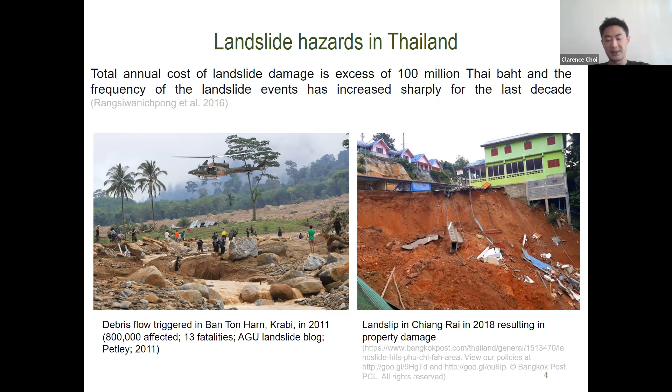And it's important to stress the potential impact and implications of our work as geotechnical engineers. Why should we spend more efforts on landslides? It seems like a topic very reminiscent of earthquakes. These are natural hazards that are ongoing, but why should we pay attention to them?

We should expect wetter climates, and we understand as geotechnical engineers that a wetter climate will cause increase in pore pressures in slopes and potentially decrease effective stress, leading to resistance, particularly shear resistance decrease, and potential increase in slope instability. So it's a chain of events happening, and that's how we justify our ongoing research efforts.

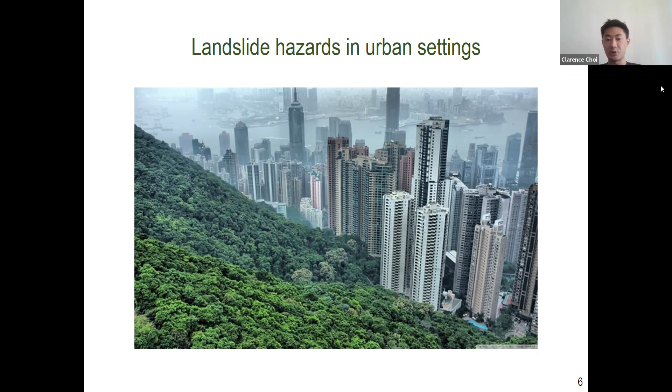So although Hong Kong seems like a very prosperous, safe, geotechnical marvel against landslides, this has not always been the case. We've had to learn from bad experiences, improve with geotechnology, and that's what has enabled us to become such a leader in the landslide discipline globally today. So I hope this helps to show that we've faced a lot of challenges in the past.

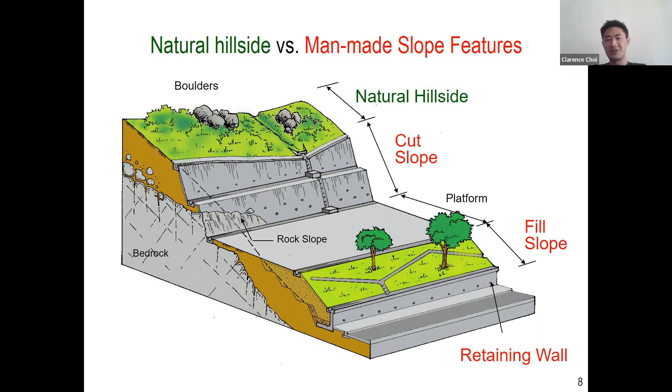Likewise, we also refer to retaining walls and retaining slopes as man-made features, and anything else above we call natural hillsides. The focus of this talk today is mainly on landslides associated with natural hillsides. We can have boulders and rocks falling down slope. We can have debris flows, which are mixtures of water and soil surging downslope, picking up these boulders, and impacting various infrastructure. So I want to stress and frame the talk today to mainly natural hillsides, and I'll place less emphasis on man-made slope features. I hope that helps you frame the presentation.

To further elaborate on the instructional components of my talk, quite commonly we get confused with landslides. What is a landslide? Is a debris flow a landslide? Is a rock fall a landslide? Is a slip of a slope a landslide? Well, you're right, these are all landslides. Even avalanches comprising snow can be a landslide. Any mass movement of earth material we refer to as a landslide. And debris flow is just one type of landslide.

So it's important to have internationally recognized classification systems for us to talk to each other as engineers. It would be quite difficult to explain, for example, if I want to say this landslide looks like this, but it may not be very clear what I'm talking about. So fortunately for us, Varnes, Cruden and Varnes in 1978 and 1996 published a systematic landslide classification system. My focus today will be on two types of landslides, debris flows and rockfall.

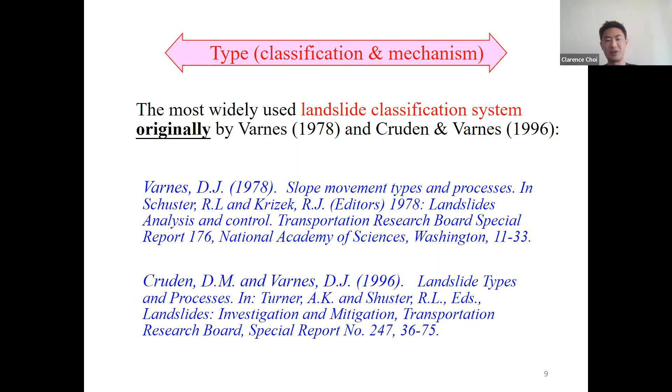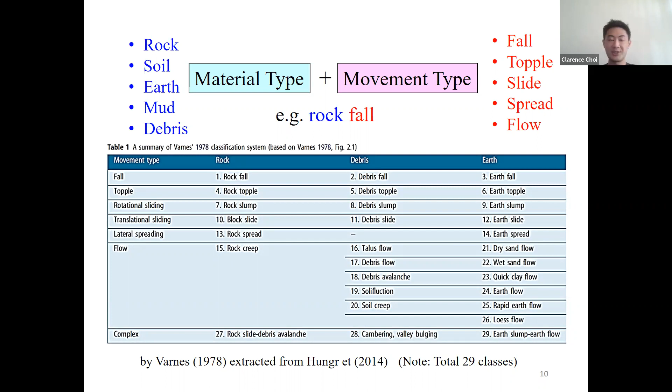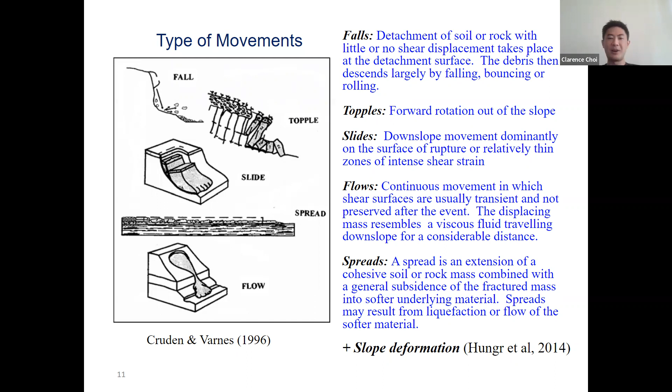To further break down the types of movements, the main focus we'll be looking at today is at the bottom of the slide here, pertaining to flows. If you're curious as to what fall, topple, slide, and spreading look like, they're shown at the top of the slide with some definitions, but that's strictly unnecessary for today's talk. Of course, you can find Professor Oldrich Hungr's 2014 manuscript in Landslides to understand the types of movements more. So I'll leave that as it is.

Why do we want to talk about debris flows and rockfalls today? Well, I feel like these are perhaps the most destructive. How do we characterize the destructive significance of a landslide? Thankfully, Cruden and Varnes in 1996 further extended the landslide classification system to include a velocity class, essentially from 1 to 7. The faster the landslide, the higher the velocity class. We can expect that the faster a landslide is, whether rock or debris, the less time you have to evacuate. There are, of course, slow-moving landslides as well.

If you're focusing on the hot topics around the world, we're interested in how climate change and changing climate variables, cyclic climate loading, are affecting the movement of these very slow-moving landslides. These slow-moving landslides have already failed, and they're perhaps creeping just millimeters per year. But the scary thing is, we don't really know when these landslides will suddenly accelerate and cause catastrophic failure.

So just to give you a bit more background, today we'll focus on only the extremely rapid landslide classes near the top. We're talking about movements in excess of meters per second. Debris flow and rockfall can travel in excess of 10 meters per second, just for your reference.

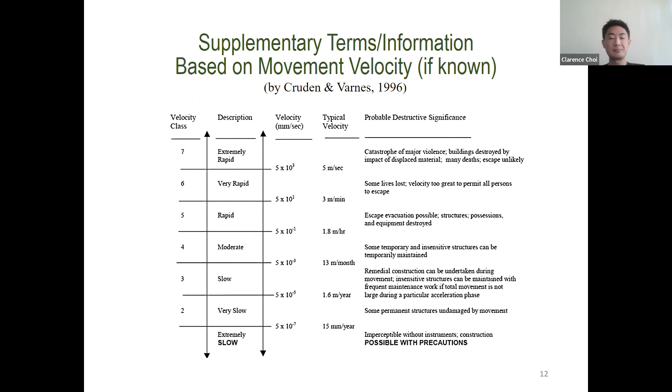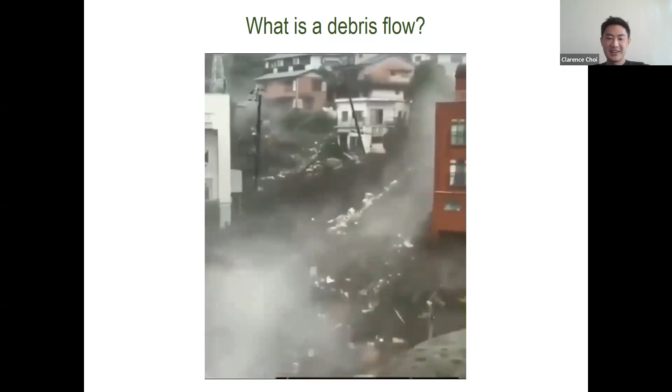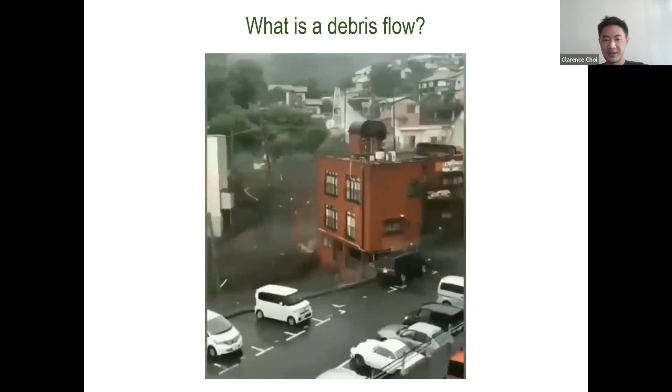So we can see that a debris flow is very mobile. It's almost fluid-like. It can carry all sorts of debris along the path, including buildings and vegetation, and there's really not much time to escape and evacuate because of the speed. Also look at the impact force resulting from the debris flow. It entirely destroyed the house along its flow path, took out the power lines, and it can even carry cars. So this is what a debris flow is like.

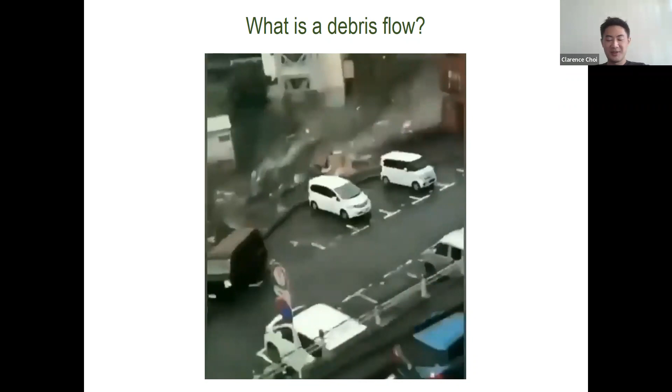So that's as much background as I want to give pertaining to characterizing the type of landslide for today's lecture. The next part of my talk will basically focus on the types of mitigation measures, hard measures, to protect the general public and infrastructure against these debris flows. These solutions will be broken down into 3 sections.

The first section, I'll talk about engineering solutions. This is practical. There's not going to be a lot of fancy research tools being used. We tend to go for large scale or field scale solutions, and we try to propose solutions that can be used by engineers. We're not going to propose constitutive models that require 14 input parameters or that only 3 PhD researchers know how to run, right? We're talking about very simple to use engineering equations and solutions that are always on the conservative side. So that's the first part.

The second part, I would still call this ivory tower research: nature-based solutions. It sounds very attractive, doesn't it? We can use nature to help us protect the general public from landslides. But this is just the beginning of this research. To actually implement nature-based solutions will require some time, and it'll require experienced engineers to be able to...

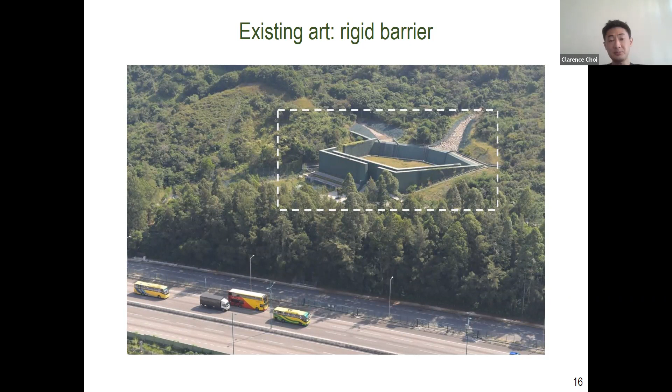So what are the advantages of flexible barriers? They blend in well with the natural terrain and environment, they're much smaller in scale, and not visually intrusive. You can install them further upslope so the debris or rock doesn't pick up velocity and momentum, meaning we don't need such massive structures. They're also cheaper to construct, but everything has limitations—you can't handle such large volumes because these nets are limited in size. There are weak points: the posts, if hit by a boulder, might be incapacitated. Also, they're made of steel, and in Hong Kong's extremely corrosive environment we're starting to see long-term serviceability problems. Notwithstanding, the concept of a flexible barrier is like a net that enables deformation, and we know anything that enables deformation can help absorb impact energy.

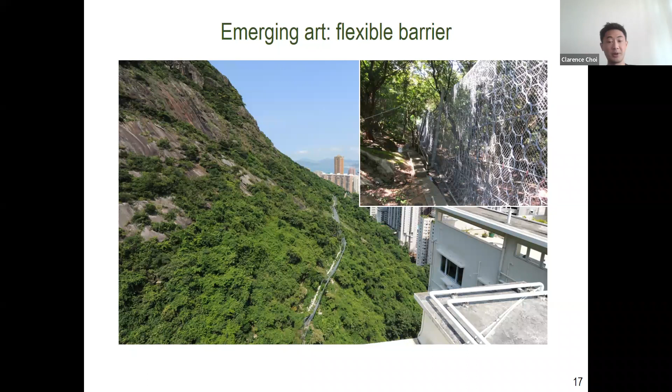How do we predict the load on these structures? Well, let's use engineering approaches, not academic approaches with fancy equations with 32 input parameters to match the impact load. This is what we use in design guidelines globally.

It's quite simple, based on the conservation of momentum. If we take the equation at the top of the slide and dissect it down based on conservation of momentum, we can break it down into the second equation in the middle of the slide.

And we can very quickly understand why we benefit from a flexible barrier. It's because of the relative movement between the flow and the barrier. This is very much reminiscent of a boxer, right?

You see the boxer on the left there. If he moves towards the punch, it's going to hurt him more than if he can move backwards while being punched. It's more or less the same concept — we want relative movement between the flow impacting the barrier, and deformation with the barrier.

So this is one mechanism. Of course, a debris flow flexible barrier has other mechanisms, such as being a little pervious, so we can let a bit of momentum on the discharge pass through the net, meaning the net doesn't have to absorb as much impact energy.

Also, when we arrest the flow, we've learned through research that granular debris flow is very frictional. The moment you shear the flow, you can mobilize a lot of the frictional resistance, and the flow will rapidly attenuate. So there are lots of mechanisms we can learn just by looking at a simple conservation of momentum.

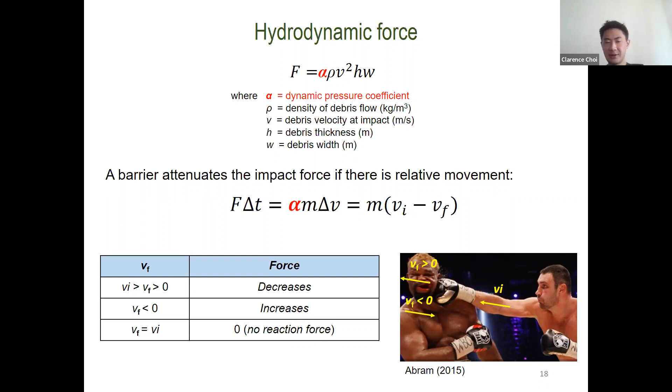V final is 0. Now, if you pick an alpha of 2, this is perhaps the extreme case where something hits the barrier and then reflects in the opposite direction at the same velocity. That would augment the impact force by 2 times. So there is some theoretical relevance in the hydrodynamic force.

The second type of force we consider is the retained static load. Let me showcase this static force with an experimental video. In this video, a debris mixture comes from the bottom to the top of the slide, and some of it hits this plate here, while some passes through downstream.

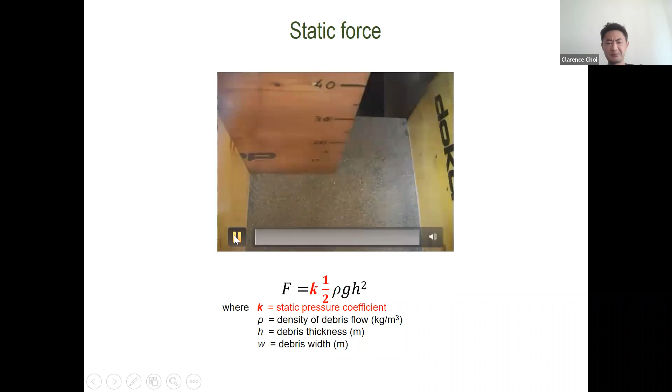So why do I want to show this video? Well, I want to show that even for a dynamic scenario, you can see on the left side there's retained static loading, and there must be some static contribution even during a debris flow impact event.

So there are design guidelines that cater for static loading. We can use earth pressure coefficients: 1/2 rho g H squared will give us a nice static load. I think that's easy enough for us to understand as geotechnical engineers.

So based on these simple concepts, we want to use something that engineers can relate to, so we can just combine the dynamic and static components to get the total impact force. Sounds easy, right? Well, yes and no.

The static load can be made conservative if we assume the earth pressure coefficient is 1. We know from geotechnical engineering that a pressure coefficient of 1 is basically treating this debris like water, with no internal strength.

That's easy to make conservative, but the dynamic load on the left is not so easy to predict. The theoretical values I mentioned earlier, 1 and 2 for alpha, are perhaps for an idealized incompressible fluid like water, but we can probably surmise that a complex mixture of soil and water is not like water at all mechanically. In fact, debris flows even have boulders. So what do we do?

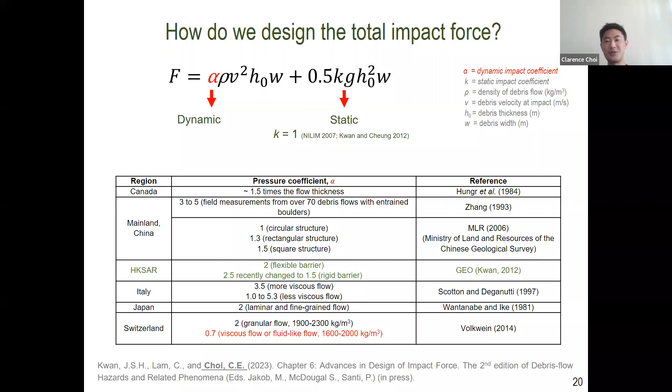And I can't share all the research findings in the talk today, but I can fast forward and show you the ultimate outcomes. So how do we study this problem?

Well, I'm a physical modeler. Varun's also a physical modeler. We understand that physical modeling requires scaling considerations. If we don't have scaling, it really doesn't make us unique as physical modelers. Anyone can do our job and make a model. The key task with physical modeling is how do we link reduced scale model phenomenon and expand it back to full scale. That's how we draw implications in research.

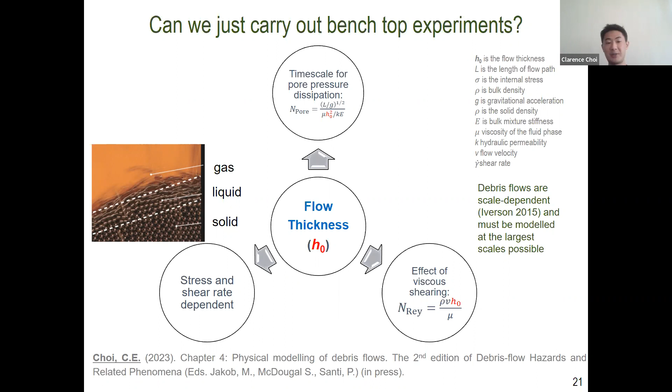So where am I going with this? Well, I want to show that because we cannot carry out small scale experiments for debris flow, it simply will not work. We have to carry out field scale flows. And this is in collaboration with Professor Charles of HKUST, and we've developed a facility at the HKU Kadoorie Centre. So let me just show a video of this.

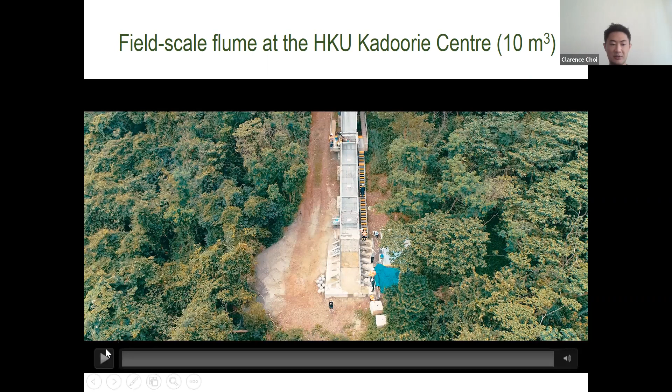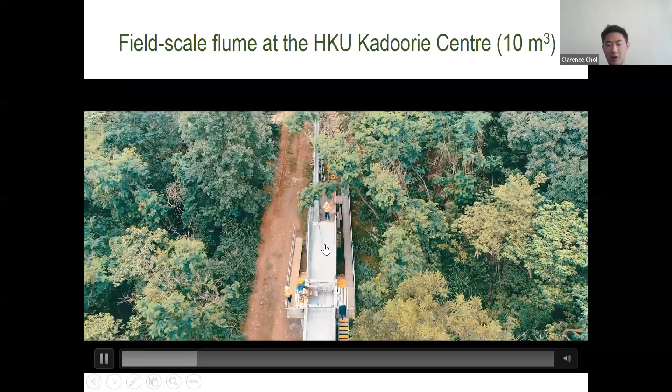This is a facility that's about 28 meters in length and can model 10 cubic meters of debris flow. There's a gate at the upstream end controlled with a mechanical arm, and we store 10 cubic meters of debris behind it. When the gates open, the debris surges down the channel.

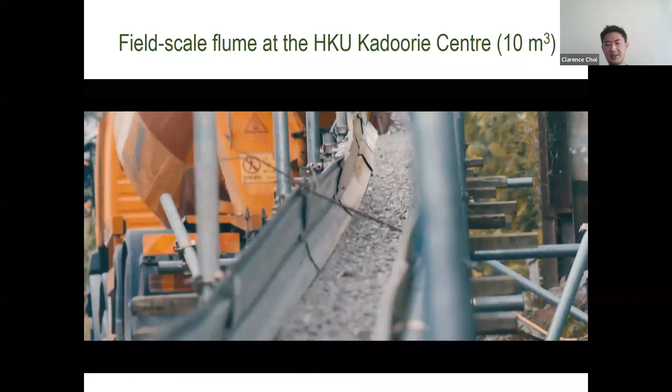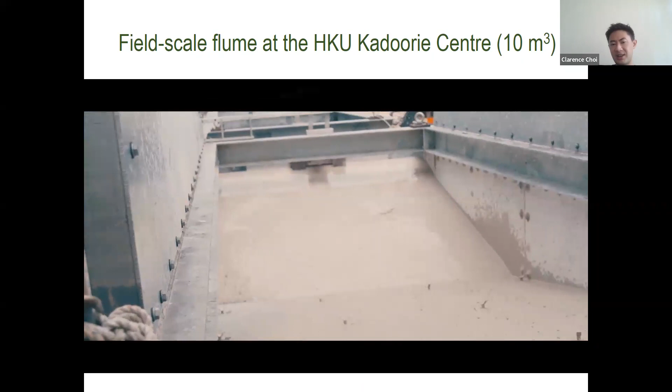Inside, the channel is instrumented. Here we use a concrete truck to funnel pre-made debris mixtures in. We can have UAVs capture displacement and velocity fields. This is the mechanical arm of the door opening, and that's the debris moving downslope on top of the instrumentation.

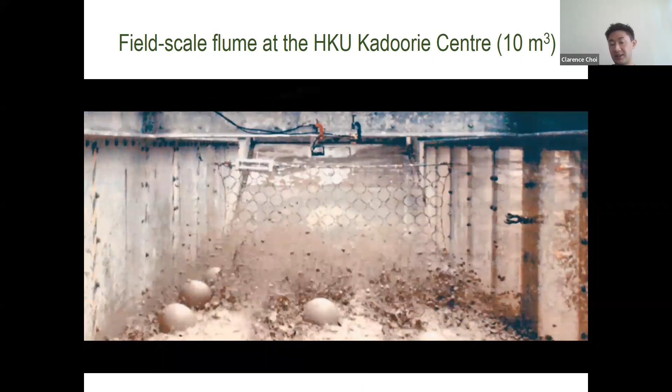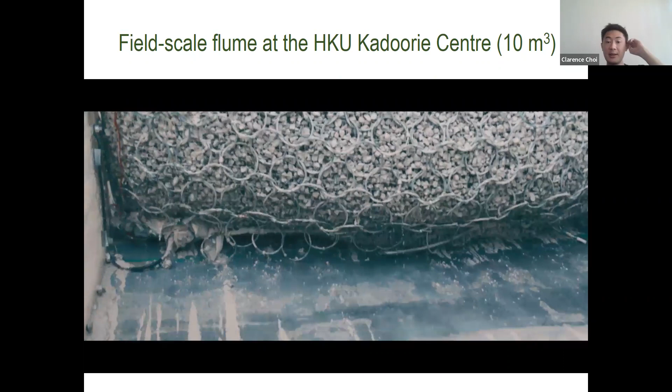This is the flexible barrier model with scaled deformation, shown from another view, and a side view looking at the deformation of the flexible barrier. Here's a plan view, along with some more fancy views from the UAV.

Afterwards, we can study the retained profiles of these barriers. This is, in essence, a large-scale facility that enables debris flow research.

Along the channel bed of this facility, we've installed a lot of instrumentation, because physical modeling is only as good as what you can measure. We developed in-house debris flow cells to measure the pore pressures generated at the base, normal stress, and shear stress. By knowing the normal stress, we can deduce the bulk density of the flow, and if we place a laser sensor directly above it, we get the flow depth.

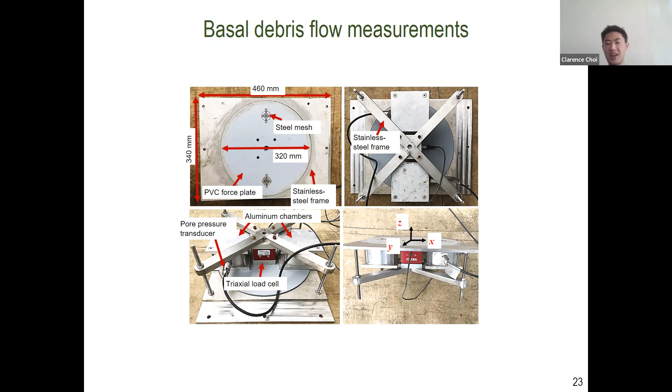Here are different views of the special instrumentation we developed in-house. We use triaxial load cells to minimize the number of cables that we need, and that's what we use.

The volumetric solid content we use is 60%, which is in line with most debris flow mixtures globally.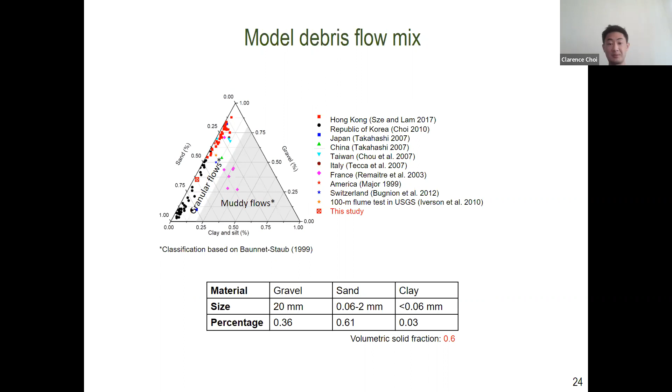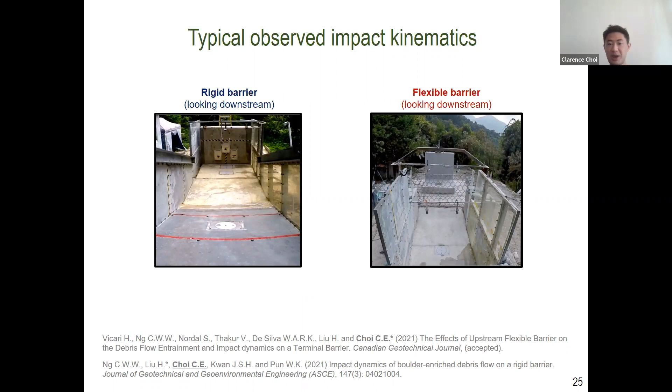Now let me show you some typical test kinematics. As mentioned, we carry out a decade of research on debris flow impact to look at how different types of structures, such as rigid barriers and flexible barriers, behave. Let's take a look at the rigid barrier on the left side.

Nothing fancy here. We have about 2.5 cubic meters of debris flow impacting a rigid barrier that's heavily instrumented. We have load cells behind the rigid barrier, so we can measure the bulk density of the flow and the load, and back-calculate some of the pressure coefficients.

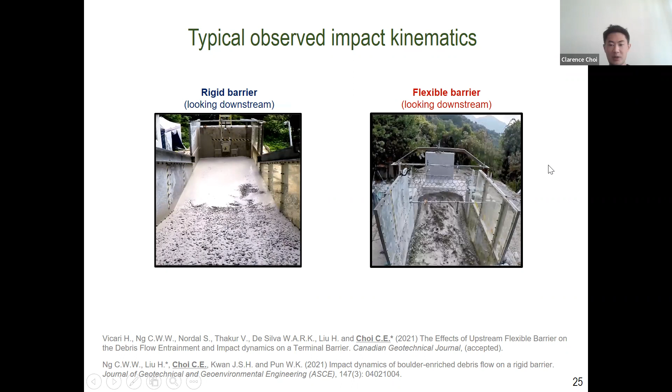Likewise, on the right side, we have a 10 cubic meter debris flow impacting a flexible barrier, and it smothers the GoPro camera, so you can't see much after that. These are just typical observed impact kinematics for different types of barriers using the large-scale facility.

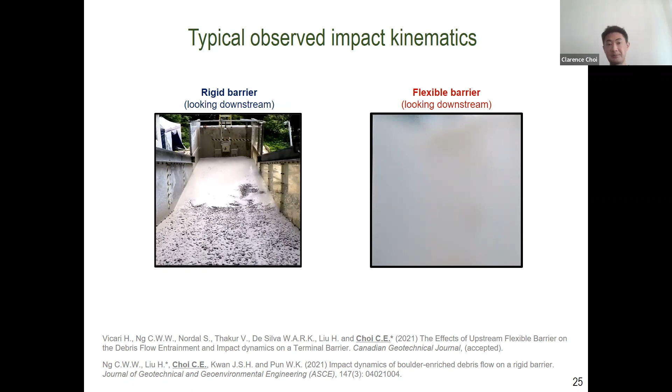Let's fast forward from when we started this research to about 10 years down the road. Eventually, working with Professor Charles Ng and his team, we developed a rationalized combination of static load, dynamic load, and proposed impact coefficients relative to existing design guidelines.

So what were we able to achieve? Research isn't very useful if you can't make an impact in practice. We were able to work with industry to change recommended values in design practice. This is the most important impact of any research: can you change design practice, can you get your research to be relevant in design guidelines?

We were able to contribute to rationalizing the reduction of the design capacities of rigid barriers by 40%. The alpha values for rigid barriers used to be 2.5; after our research, we were able to tone this down to about 1.5. Hopefully we can also see the rationalization of flexible barrier alpha coefficients from a value of 2 to 1, representing a 50% reduction in design capacity.

Any reduction in design capacity is pretty much saying that we're reducing cost. So we hope we're no longer over-designing barriers because we don't understand the impact mechanisms. But now, with the rationalized experimental evidence we have using large-scale facilities, we can bound the impact pressures and propose optimized values, not just locally, but hopefully globally as well.

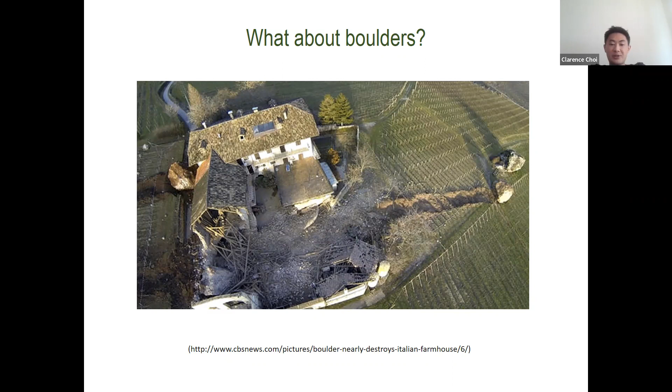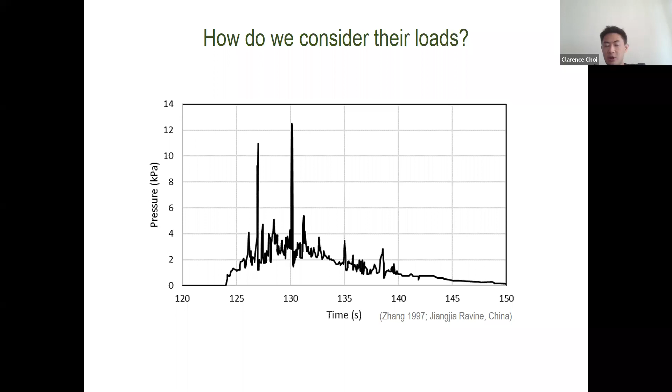Well, we can see that there's two types of loads. There's the distributed loading from the soil water mixture. By soil, I'm not referring to anything boulder-esh, such as anything larger than 200 millimeters perhaps. And we also see concentrated loading from boulders. These are very short impulse loads that generate very high pressures on the load measuring device.

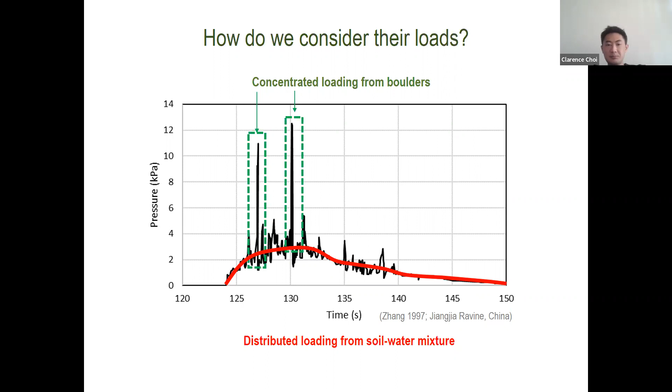So how do we design for the boulder impact force? Well, to be very frank, it's very difficult to estimate boulder impact force. I'll explain why. A boulder, when it touches the surface, let's say the surface doesn't deform much, is in essence a single point contact. Now, a point contact with an impact force applied to it can result in an infinitely high stress, if you think about it, in terms of force over area.

So how do we propose any approach to rationalize the computation of the impact force? We would have to also consider maybe there's potential deformation at the surface of a hard inclusion impacting a deformable surface. So most design guidelines around the world adopt Hertzian contact mechanics.

And the problem with Hertzian contact mechanics is we assume linear elastic behavior that's isotropic. We don't consider any frictional components. We assume that the contact radius is much smaller than the dimensions of the bodies involved. And that's how we can get some equation to predict the impact force.

Now, based on the body of research we've done, we know that Hertzian contact mechanics, which is purely elastic in nature, substantially over-predicts the impact force by the boulders. You could say we are safe, but on the other hand, we might also have a lot of design problems because the impact forces we predict are not practical to mitigate against because they're too large.

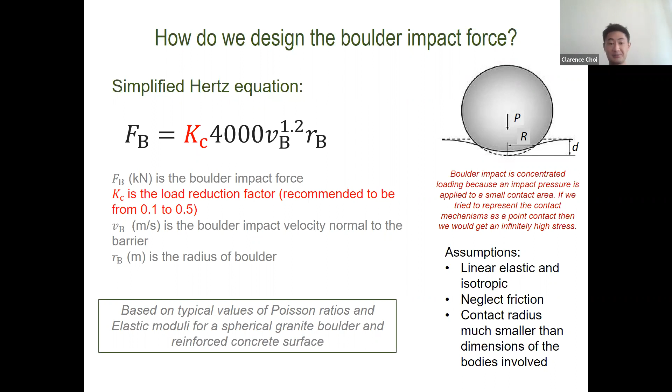Bear in mind that this design has not been evaluated or validated, right? We just place these prescriptively in front of a barrier. Conceptually, we understand if a boulder hits this baffle, it should survive, the I-beam should deform, it should take some energy out, and hopefully it doesn't impact the post of a flexible barrier or damage the concrete face of a reinforced concrete barrier. So conceptually, it's easy to understand why we place these steel baffles upslope.

Now, I would consider boulder impact on a shallow footing with the I-beam an extreme soil structure interaction problem. Why is it extreme? Well, I talked about it already. We have a boulder with a point contact on a structure, which means that the stresses will be infinitely high.

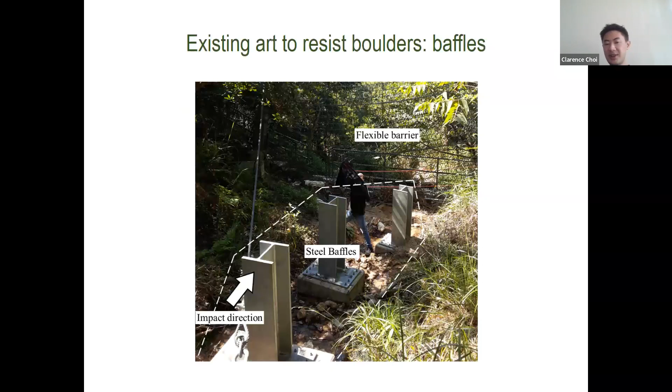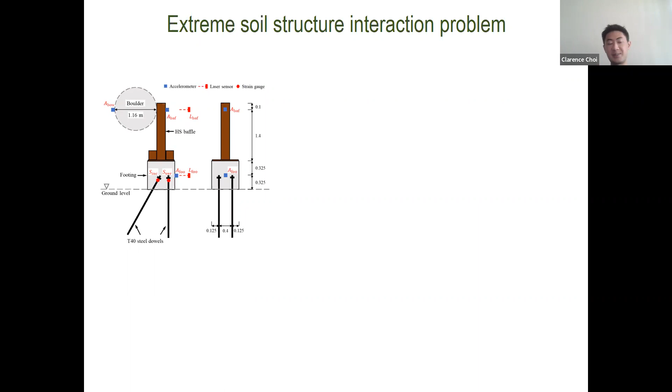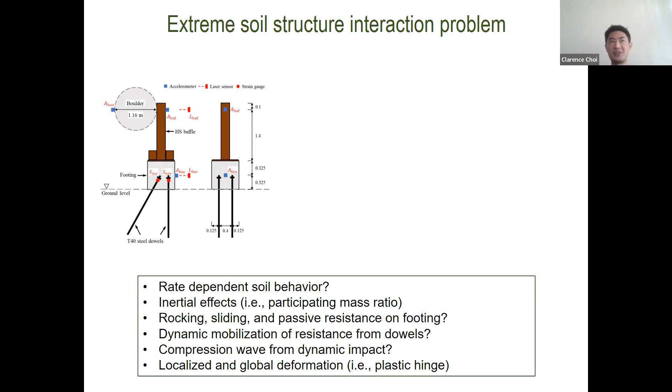This is a very interesting problem as a geotechnical engineer, and for me it's interesting as a researcher because I have lots of questions. What's the rate-dependent soil behavior we should expect? Is it different than quasi-static loading in the soil for the steel dowels? Is there an inertial effect? Does it matter how heavy the baffle is relative to the boulder? How will this shallow footing behave? Is there going to be rocking behavior as in earthquake problems? Do we care about sliding? Can we mobilize passive resistance? Is there going to be compression waves from dynamic impact? How do we cater for this inside the constitutive models of the soil? Last but not least, we have localized and global deformation, potentially leading to plastic hinge formation from a structural point of view. If you think about all these questions, it becomes a very complex problem.

However, we decided to impact one of these structures in the field first, and let's see what happens.

Well, if you're not sure what happened, let's take a look at the PhD student here. He's not very happy because we did not expect this to happen. We didn't expect there to be structural failure. This baffle configuration doesn't work at all. It's because the boulder is much heavier than the baffle and the footing. It doesn't even mobilize any resistance from the foundation.

So we had to stop this research project in collaboration with industry, and we had to go back to the drawing board. When we did, we realized there's no need for such a complex design. Why don't we revise our design to just a pit in the ground, one monolithic hollow section, and then fill the hole with concrete. There's nothing fancy here - it's a very simple engineering solution back to basic principles of participating mass ratio. We just make this thing as heavy as possible so we can mobilize resistance from the soil. Let's see how it works.

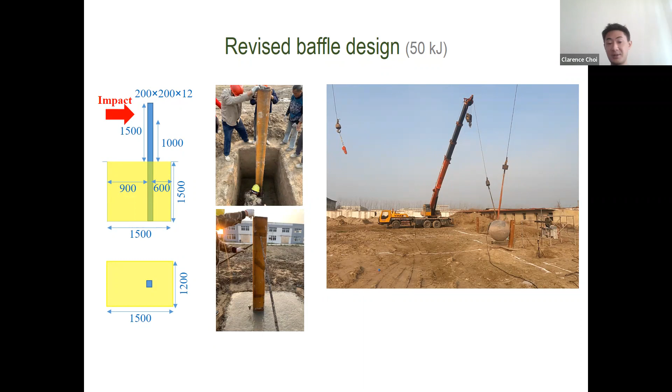Well, it works fine, works like a truck. No need for such complex structural connections, no need for fancy ground anchors and tiebacks. This works quite well for up to very high energy levels. What you see here is 50 kilojoules, and this was a joint project with Dr. Andy Suyuchun in Nanjing University, at one of his sites. He was able to help us carry out the experiments here.

So this project just started and we just finished the test. We haven't had time to interpret the results. As I mentioned, this can be a very complex soil structure interaction problem.

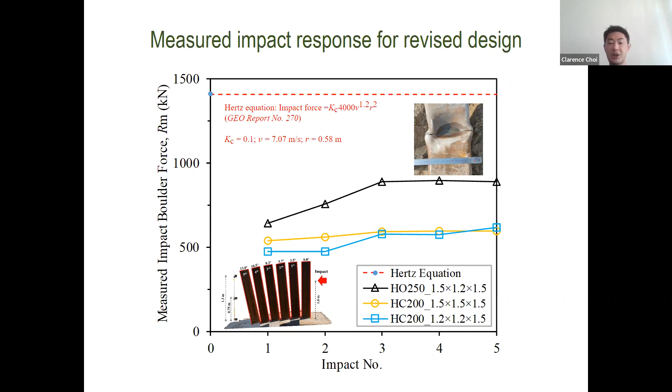Essentially, the y-axis is the impact force, I apologize for not mentioning that earlier, and the x-axis is the number of repeated impacts on a particular structure. Hopefully in a couple of months, when we improve our interpretation, we can share more unique findings with you.

So the next question is, what's happening with this problem? Well, we haven't had time to think about it because we've had to initiate the next project. We want to combine several baffles with industry to create straining structures to catch these boulders using several steel members placed inside concrete footings. So we're now revisiting our data and looking at using large deformation, nonlinear finite element models to capture the response of these straining structures, so we can place these types of structures on hillsides to arrest boulders before they impact the flexible or rigid barriers - this will save impact capacity and cost.

So I want to just showcase this slide to show you that we're working on straining structures, but we've barely scratched the surface. We really believe that force-based approaches are not so reasonable. We should be looking at everything from energy-based approaches first. The reason force-based approaches are not reasonable is we've learned that it's very difficult to evaluate how reliable your forces are if you measure it using an accelerometer and just the mass of the boulder. We're also not sure how sensitive the constitutive behavior of the soil is. So is there any value in carrying out complex numerical modeling? I've just thrown a bunch of questions out here, not to confuse you, but to show you that there's a lot of work to do in this dynamic soil structure interaction realm of research.

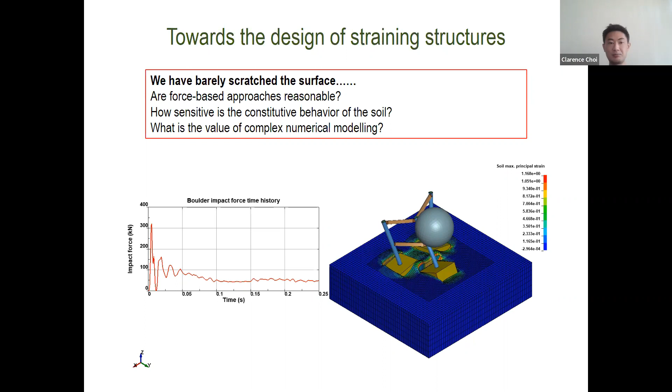So that's all I want to talk about for engineering solutions. That's the practical part of the problem. Now let's look at the more research-oriented part. I call this the ivory tower research, which is a joke, but hopefully one day we can rationalize nature-based solutions to use for landslide hazard mitigation.

Notwithstanding, there are other complexities with using forests as a natural barrier. For example, trees can uproot. If they're impacted by a very heavy force, they can either rotate over, detach from the ground, become part of the debris, or if a tree is very strong, nothing will happen to it.

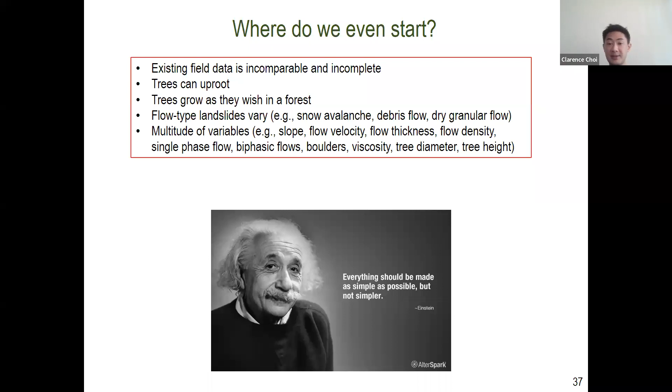Now, let's change the reference here. So we can imagine that the jet is the obstacle, the tree stem, and the air that the jet's moving in is the dry granular flow. Now, what happens if we do that? Well, if we do that, we see that dry granular flow hitting an obstacle will also form cones.

In fact, depending on whether the flow is steady state or transient state, the shape of the cone will differ. For steady state flow, we get quite a linear cone, as you can see in the middle. For transient state or unsteady flow, we see parabolic cones.

We can also use the concept of supersonic flows to describe this problem. Why can we do that? Well, supersonic only means if the flow velocity is greater than the sonic speed in the medium. And the sonic speed in air is 340 meters per second. In water, about 1480 meters per second. But interestingly, in dry granular flows, the sonic speed is only less than 1 meter per second. That's why we can generate these cones.

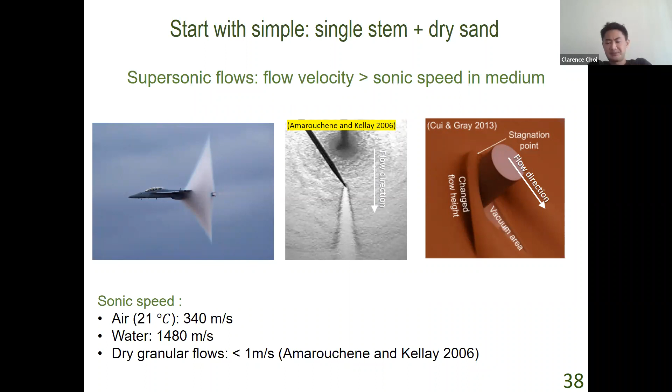Now, let's add the next level of complexity to this problem. What if we have stems adjacent to each other? Let's say we have dual stems, or two stems, in dry sand. Then what happens is we get these jets or cones essentially interacting with each other. In between two stems, we see that the flow will actually accelerate because the momentum is concentrated between stems.

And evidently, this is influenced by the spacing between the stems. If your stems are very wide apart, you're not going to have any near field effects. But if you place them very close together, you can see momentum concentration. And on the extreme end of the spectrum, if you have them touching each other, it's almost like a rigid barrier. So these are the effects we want to model.

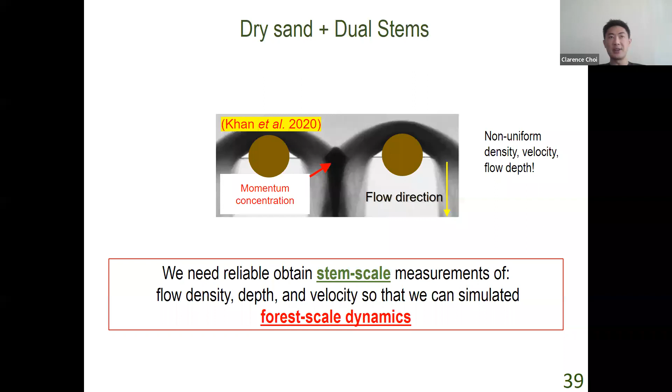Now, we need to think about this for a second. These cones are very specific in shape in terms of angle, length scales, stand-off distance upstream. So how do we obtain stem-scale measurements of flow density, depth, and velocity so that we have any chance of modeling forest-scale dynamics? Using conventional instrumentation and experimental means, there's no way for us to measure the shocks and interaction between shocks. So we need to use a new paradigm of methodology.

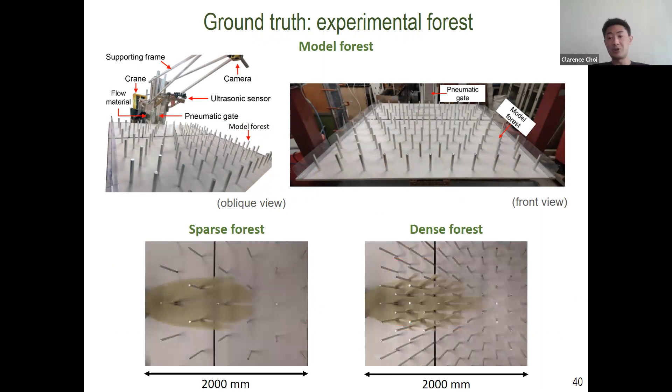Now, just like any other research, we often want to create a ground truth. So this is easy for us. We've created lots of physical models, and here we just create another one, a model forest with a regular pattern, a triangular array of aluminum cylinders that are more or less rigid. We can vary the spacing of the stems to model sparse forests and dense forests. And at the top of this model, we have a container to hold the dry granular material or debris flow that's wet and release it downslope.

Now, if you look at the two GIFs at the bottom, you can probably see how do we even use this data to calibrate a model? Because number one, it's dynamic. Number two, look at the number of shocks we have to capture. And these shocks are not the same. They diminish along the flow direction from left to right.

We have to be able to capture the local changes in velocity, the local changes in flow depth, and look at the complex pattern of the dense forests. If you notice carefully, the flow front in the dense forest case is much faster in the middle than it is spreading towards the side.

So how can we even track this dynamic process? If we use the camera mounted on top of this model shown here, we're capturing hundreds to thousands of frames per second.

Surely we cannot ask our PhD student to annotate 1,000 frames per second. I think they would quit, right?

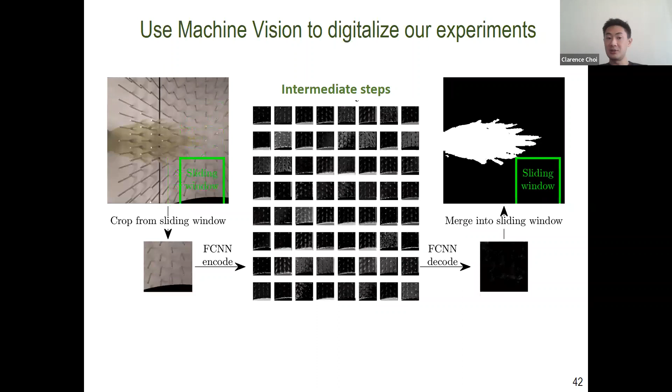PIV can only give you velocity fields if you have tracer particles or if you can detect the texture in the flow. And you'll get lots of PIV vectors that are not easy to use for calibrating because you have so many wild vectors. So this is the advantage of our FCNN segmentation technique for complex flow structure interaction problems.

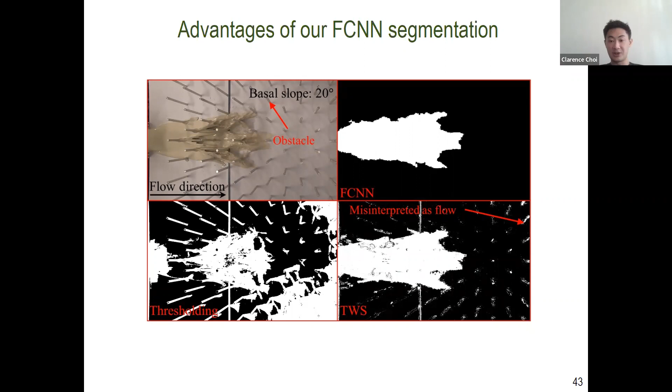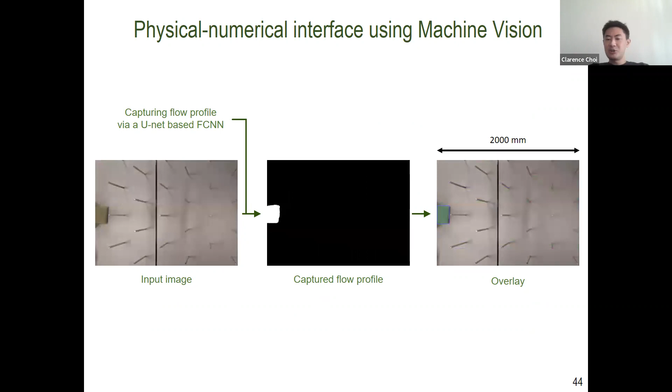The problem is the digital twin has no constitutive behavior. It has no physical behavior, no rheological constitutive behavior. It's just a digital overlay of the experiments. So what do we need to do?

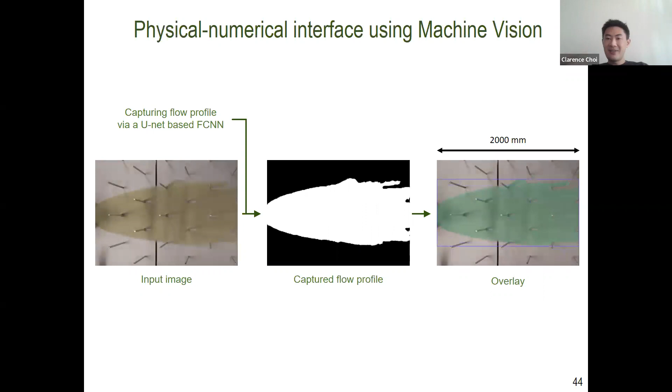Well, to use this so-called digital twin, we need to give it mechanical properties. How do we do that? Well, we can use constitutive models that are well established.

In this case, I work with my collaborator, Dr. Jinhyun Choo, who's at KAIST now, to use a material point method simulator to model the transition from elastic to plastic behavior. We use the Drucker-Prager criteria. We use a mu-I rheology for the granular flow.

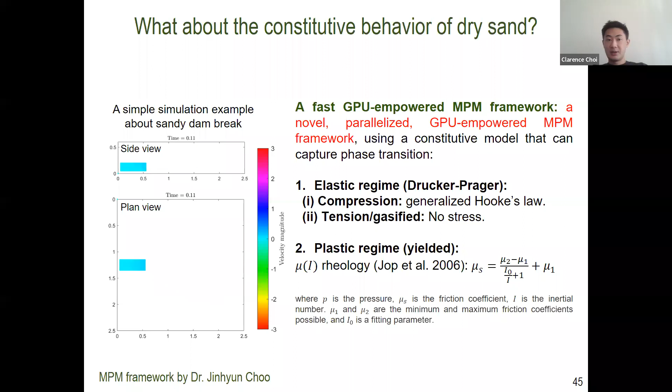Any MPM model, numerical model, is only as good as the input parameters that you give it. We always hear garbage in, garbage out. It's true, and it can be even more tricky when some people are trying to publish papers and they only show you one calibrated case. If they do 100 tests, they only show you the best match case for those tests. But how do you prove that your input parameters work for the 100 different cases?

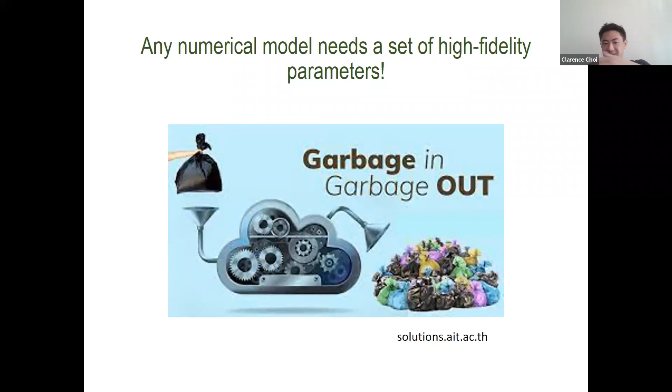So we carry out automated calibration of our MPM model just by using intersection over union, which I'll talk about in the next slide. So what are we doing? Well, we input an initial guess for the input parameters. This initial guess must be within the physical constraints of a parameter. We're not going to put a friction angle of 100 in. For dry sand, we're probably anywhere from 25 to maybe 40 as a maximum bound. So we input the physical extents and we let the genetic algorithm compare all 100 of our experimental cases and come up with the optimum set of input parameters to run.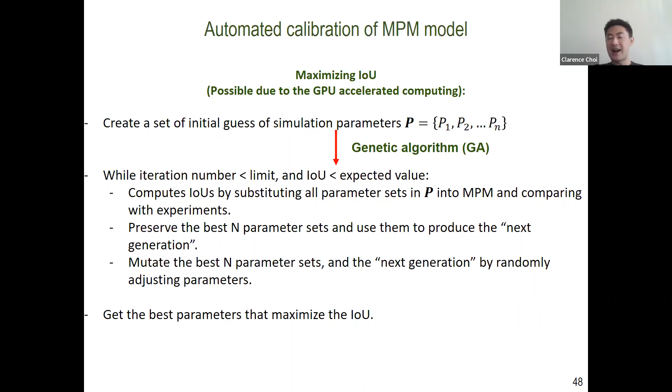So we carry out iterations, we find the best parameters, we mutate them and preserve them. How do we know whether a set of parameters is good or not, you might be asking. That's where IOU comes in, maximizing intersection over union.

What is the key performance index? Well, I just mentioned we use intersection over union. So we take our digital overlay, our digital twin, we compare it with the experimental results, we overlap it, and we see how different it is. If it matches perfectly, we have an intersection over union of unity. If it doesn't, it's zero. And we just try to maximize the intersection over union for a wide range of experiments. And then we get a high fidelity set of input parameters.

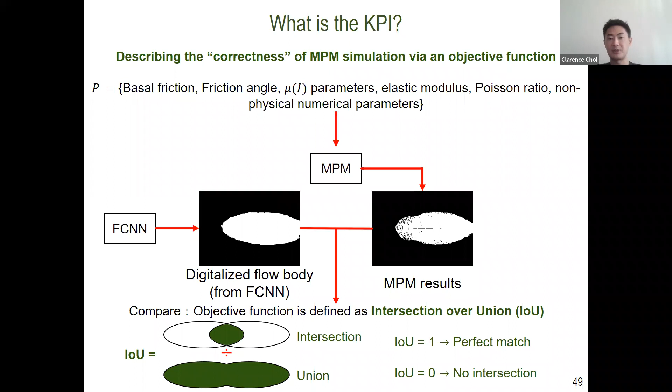So how did our genetic algorithm work? What you see here are two cases. On the left, we have 20 degrees. On the right, we have 24 degrees for the slope. The red line is the physical experiment, digital overlay from the FCNN. The blue blob is the MPM. So it works quite well for a different range of inclinations.

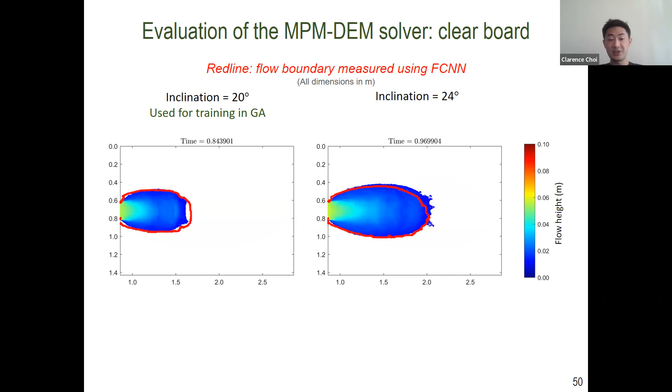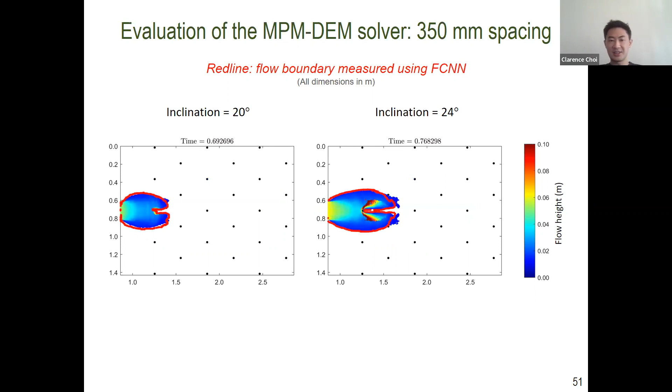So what happens if we put in the forest? This is the same input parameter. We haven't changed the input parameters for different simulations, it's the same set. Well, for trees, it gets a bit wacky at the front. I would still say it's acceptable. The red is the experimental digital overlay, the blue is the MPM. And then if you have a denser configuration, we're still doing well. We're not picking and choosing.

We're uploading these entire videos for the reviewer to look at during the review process. We're not just showing a few snapshots and saying, look, we have a great match. For any manuscript now, we can actually provide the entire video to show that we have a high fidelity set of input parameters for a wide range of simulations. And this in the past has been very time consuming to do for any researcher working on dynamic landslide problems.

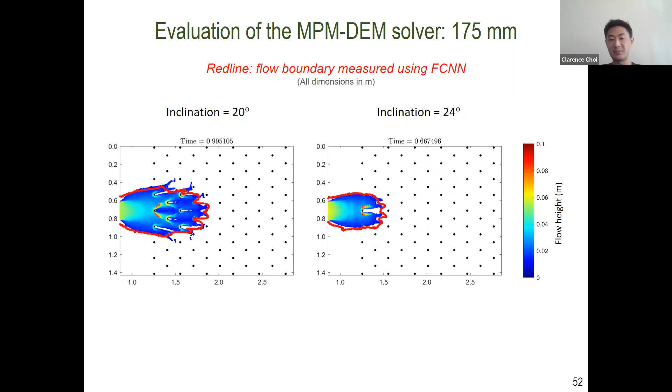So we can use our model now to carry out near real-time back analysis. We can look at different patterns. Here's a rectangular pattern or square pattern. An interesting phenomena, though we just started the research, is the trees, although they're not channels, they behave like channels. So if you have a rectangular or square pattern, you can accelerate the flow through momentum concentration in the middle and increase the travel distance or mobility of a flow.

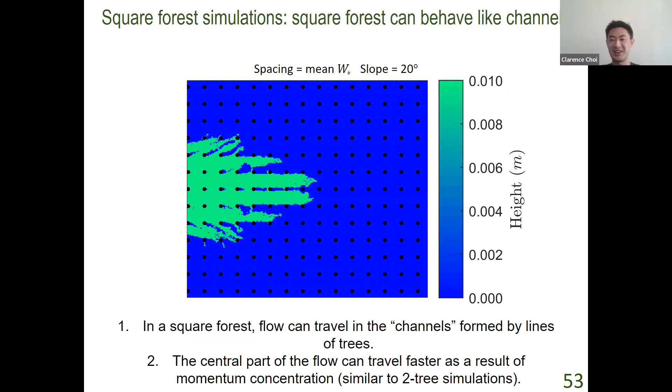If you densify the forest, you still get the same phenomena, but it becomes a lot more dissipative in nature. The flow front travels quite far, but the density of the flow front is not as significant. So this is what happens for a square regular pattern.

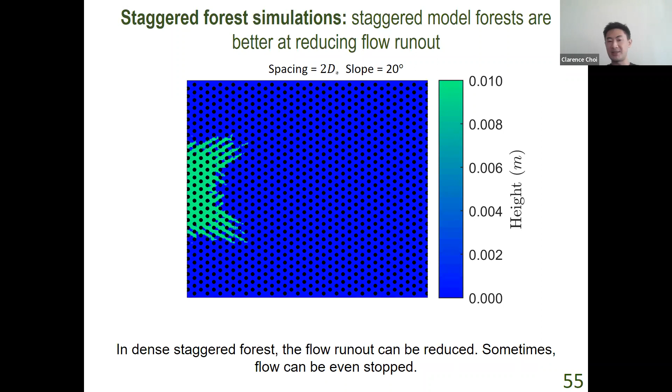What happens if we use a staggered formation? Well, it becomes very effective at acting as a natural barrier to kill all momentum. So what happens if we make it more sparse? Well, you still see the channelization effect if you zoom in. So it's a scaling issue. It depends on how you scale your forest relative to the flow parameters, is what we've noticed.

So in between tree stems, we see something we call momentum boost, which makes the flow move faster, travel further. And you can also have momentum dissipation when the flow hits an adjacent stem downstream. So there are competing effects between momentum boost and momentum dissipation. So if we have the concept that putting a forest along a slope must be better than not putting a forest, this may not always be the case because you can have momentum boosts depending on the configuration of your trees.

You might be thinking, who actually grows trees in a square pattern? Well, for cultivated forests, it's very normal. We use square patterns - evidently this is not for a debris flow, but there are square and rectangular patterns for cultivation because it's easier. If we want to use cultivated forests as a natural barrier against landslides, we need to revisit the spacing and pattern we adopt, which is a potential implication at the very early stage of our research.

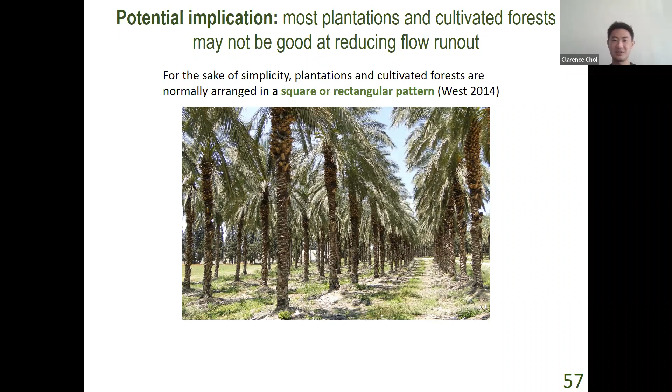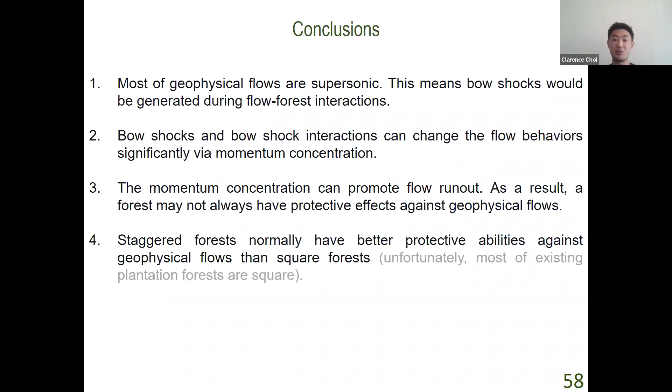So some key conclusions for the nature-based solution. Most of the geophysical flows that we deal with tend to be supersonic, so we have to be able to capture the bow shocks that form. Bow shock interaction can either boost momentum or dissipate it. The momentum boost can increase the travel distance and velocity of a flow locally. And we tend to want to use staggered formation for cultivated forests, which might be quite obvious, but it's not so obvious if you realize there's still momentum boosts going on locally.

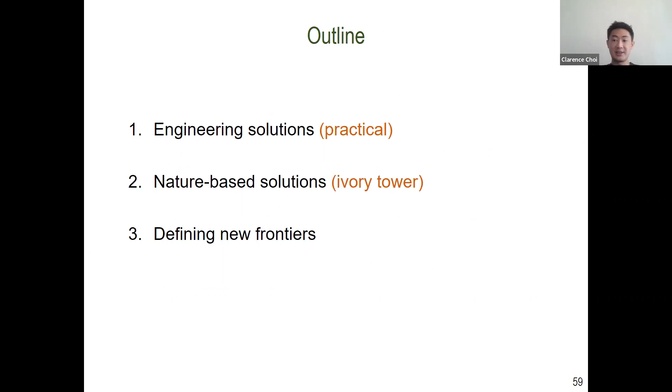So I've been talking for a long time, my throat's getting dry, but the last part is defining new frontiers. So this part is just me as a researcher trying to motivate young geotechnical engineers to pursue a research career.

Why I want to do that is we need more scientists to tackle pressing issues in the world. And there are a lot of pressing issues in terms of geotechnics. Climate change will cause a lot of problems for us. We're going to see extreme rainfall events that, cyclically, with drying and wetting, can affect the movement of slopes.

What you see at the top left is the Big Sur landslide along California Highway. This landslide has been moving slowly for years, and the question that has caused a lot of problems for engineers is: when will this landslide accelerate and run out?

How do we understand the effects of climate loading on this landslide? This is not a slope instability problem because there's already a well-defined slope surface here, right? It's just moving, sliding frictionally on here. When does it accelerate? When does it decelerate? When does its strength harden? When does its strength weaken, right? So these are complex climate change related issues.

There are lots of slow moving landslides around the world. Another problem is we've seen a substantial increase in wildfires globally over recent decades, and some of these have been devastating for ecosystems. We know that forest fires will alter the properties of soil - it'll make the soil hydrophobic. Hydrophobicity causes water from the rain not to be able to infiltrate, and run off instead. When it runs off, it erodes all the surface material and you can generate debris flows very easily.

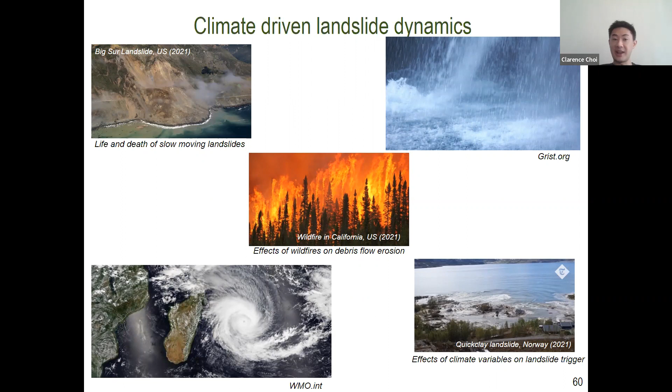Last but not least, of course, we have thawing of permafrost regions around the world. So climate-driven landslide dynamics will be a very interesting topic for researchers to tackle moving forward.

Other types of landslide-related problems - we've also been looking at submarine mass movements. Why do we care? Well, we're moving offshore, we're building infrastructure offshore, and these submarine debris flows do pose a threat to our infrastructure. They impact it, they transport mass amounts of sediment. Off the coast of Africa, one of the largest landslides ever recorded went on for days under the sea, and no one knew that was going on, right? So these landslides are not just affecting infrastructure, they're transporting pollutants further out in the sea.

One question is microplastics. We see that there is an increasing microplastic concentration in the seafood we eat, in the fish we eat, in the shrimp and prawns that we eat. We're detecting pieces of plastic inside the food that we eat, right? So how is it getting there? Well, coastal cities - when we discharge our effluent from something simple like washing laundry from a machine, plastic fibers will also discharge.

We have all sorts of plastic from tires washing out into the sea, and there's actually a lot of plastic around the coastal regions of our cities. These submarine mass movements don't necessarily have to be a debris flow, it can be any type of gravity flow, which is principal in transporting these microplastics out. So as a public policy issue, do we need to think about the plastic footprint of coastal cities?

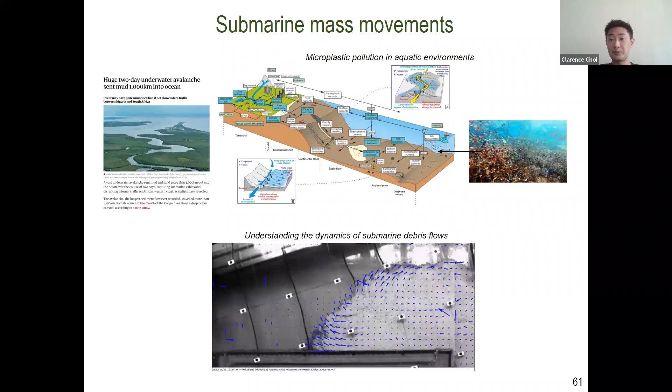Last but not least, I think it's interesting, more blue skies, to look at the dynamics of landslides under hyper and microgravity. Varun, Om, and I would know that hyper is just a fancy word for centrifuge modeling, and micro is gravity less than that of Earth, 1G. How do we simulate that? Is the only way to go on a jet and simulate microgravity conditions for a few seconds? Or is there a smarter way to simulate microgravity?

And we can study how flow-type landslides move under hyper and microgravity. So I think these are very interesting research directions to push the forefront of knowledge.

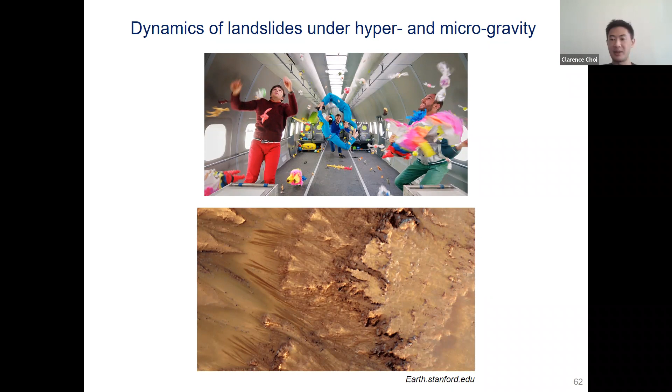So thank you so much, Dr. Clarence. I think your presentation is one of the best that I have ever heard. It really kept me concentrated on your presentation. Actually, I wanted to work on another paper, but when I listened to your presentation, I couldn't stop. Thank you, thank you for listening. It's very interesting. Actually, I wanted to hear your early part about flexible barrier, and then I was caught up by the second part about those kinds of nature-based solutions. It's very interesting and paving the way for new research, especially since you integrate AI into your research, and also you have a digital twin, which is another popular new branch of research right now. At the end, I think you already motivated some of the students here as well. So I really need to say thank you so much. And I think, if you don't mind, we may try to open up the floor for some questions.

Maybe you can drink some water for the time being. I'm okay, I'm okay. We can open the floor up. Thank you for your offer, Dr. Any questions from the floor? Any student, any attendant would like to ask a question? I see Dr. Tayanan also here. Nice photograph - I'd rather see his real face though. I'm not sure if he's here or not, but we can see his display. Anyway, any question?